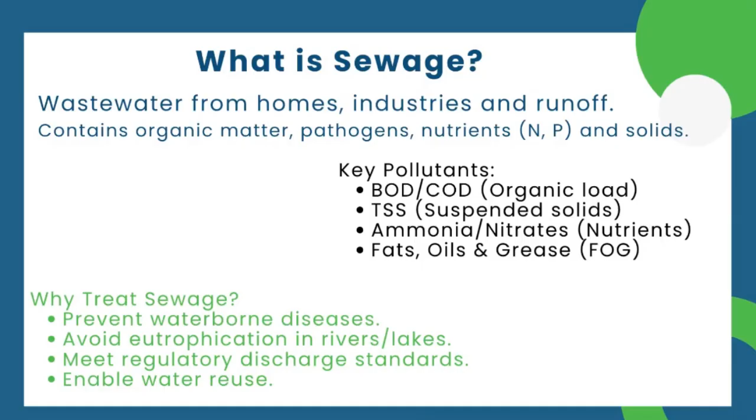As a result, what is happening? The untreated sewage is going into the ground, excess water is going into the nearby drain, like our Musi River in Hyderabad. And this Musi River happens to be the drinking water source for all the downstream areas. For example, Suryapet's drinking water source is the Musi River. And this water goes and joins another river, Krishna, which is the drinking water source for towns like Vijayawada, Guntur, even Chennai, right? So untreated sewage is like a time bomb. This is reason number one why we need to treat wastewater.

So here we are doing a very small exercise on understanding how to make sewage treatment plants work. We all hope this will contribute to better sewage treatment. Let us move to the next thing: the basics of biological treatment.

When we talk about sewage treatment, traditionally all our ancient civilizations, like Harappa and Mohenjo-daro, existed next to a water body, a lake or a river. If you see any major city in the world, not just India, every major city is next to a river, or there is a river in the middle of it, because in ancient times there was no means of transporting water. People had to live where water was available. A person cannot live without water, so the population had to exist as close to a water body as practically possible. So every major city has a river.

Now, how does it work? Whatever wastewater we generate typically goes into the river. We take water from the river, we give back our used water into the river. Now, what is the river doing? A river has a natural purification mechanism, which means it is purifying our sewage. How does this purification work? Like we discussed, there are three major treatments that happen.

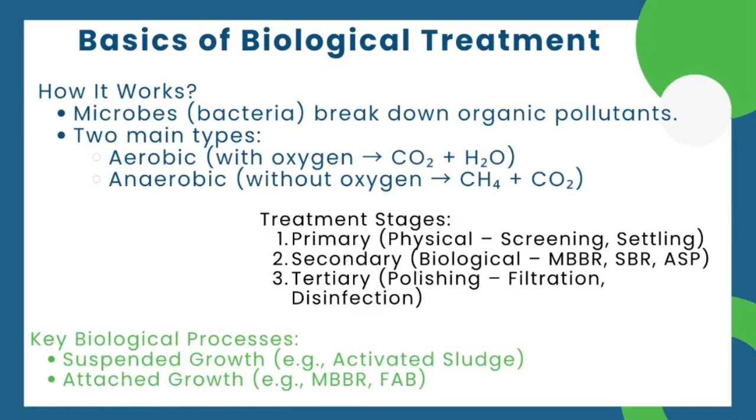All right. So one small concept that we need to understand here is suspended growth versus attached growth. What is the meaning of suspended growth? Suspended growth means bacteria is present in water. Attached growth means bacteria is not present in water, it is attaching to some surface like the walls of the reaction chamber or a process tank, right? Or MBBR media. There are advantages with attached growth. Suspended growth is a slightly older process, whereas attached growth is a more modern process.

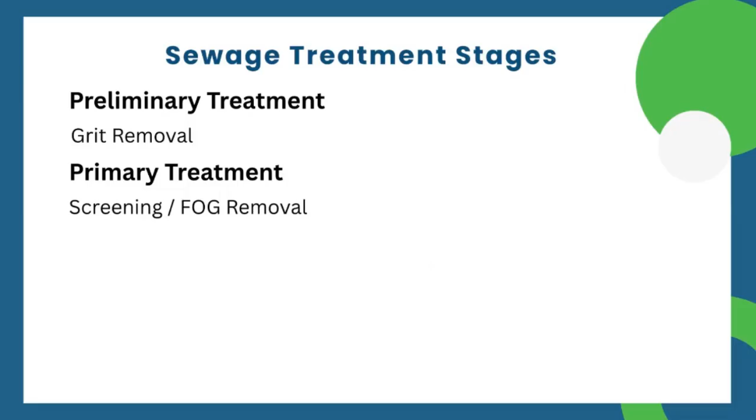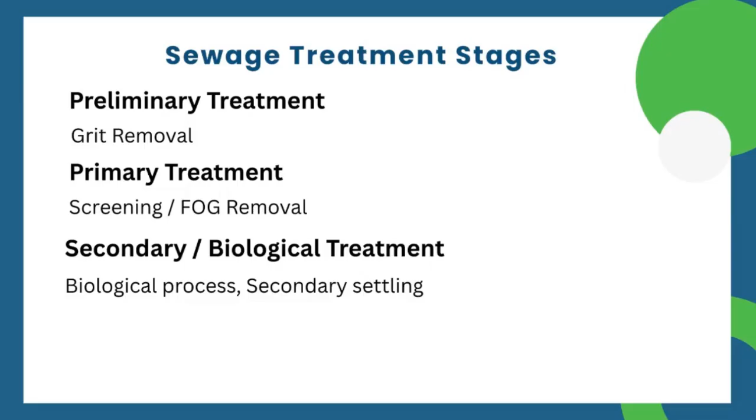So moving forward, preliminary treatment or primary treatment, as we discussed, contains grit removal, screening using bar screens, mechanical screens, rotary drum screens. Depending on the volume or capacity of the STP, we design the kind of primary treatment or screens that we require. FOG stands for fat, oil, and grease. And secondary is basically the biological process. And settling is also secondary process because you are removing dead bacteria and any physical impurities.

And finally, tertiary treatment is disinfection using chlorine or sodium hypochlorite or UV lamps, ultraviolet lamps, ozone or chlorine gas, and finally media filtration. When I'm not using the word pressure sand filter here, we could be using simple gravity sand filter also. Gravity sand filter or even a pressure sand filter, activated carbon filter, membrane filtration. These are all part of tertiary treatment.

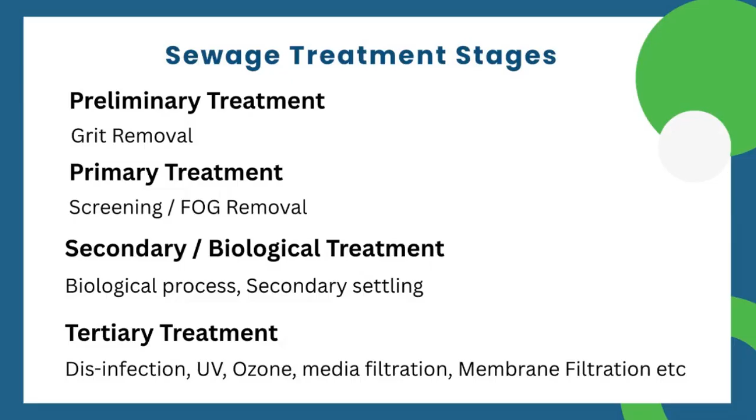All right, let's go back to the topic that we were discussing one slide before. Suspended growth versus attached growth. What is suspended growth? Suspended growth means simply bacteria is present in water, right? It is not attached to any surface. But what are the disadvantages of this? When the water is flowing, bacteria is basically something that you can't see with our naked eye. It's so small, it just goes out with water. So it's very difficult to retain bacteria in a suspended growth process. It is always going out of your process tanks.

That is why in traditional old process, you have sludge recirculation. It is called RAS, return activated sludge. So all the sludge is returned back continuously 24/7 into the aeration tank. Okay, now this is the older process, right? And what is the disadvantage? The disadvantage is you require huge process tanks. The retention time is much longer in the process.

And today, space is a premium. A square meter of land in city would cost anything from 50,000 to 1 lakh. So in such places, it's not possible to build huge tanks or spend a lot of money on investment in tank construction. So this is a disadvantage. We want a more efficient process. So the more efficient process is attached growth.

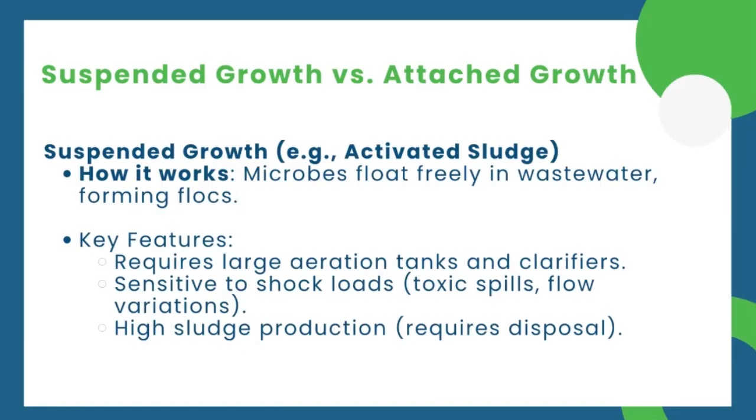All right. Now, this also has a second disadvantage. It generates a lot of sludge, right? And this sludge is again something that has to be separated and disposed of separately, which is again going to take more space and more equipment. So any suspended growth process, return activated RAS process, extended aeration process. Extended aeration process is one of the oldest processes of biological sewage treatment, and that uses this suspended growth process. As a matter of fact, SBR also uses suspended growth process, right?

Then what is attached growth? Attached growth is something where you are putting some media. Media means something where bacteria can attach and grow. It can be even a simple stone, pebble, right? In traditional ETPs, if you see, water is made to flow over rocks, large number of rocks. Rocks are used because there will be gaps between the rocks. Water still flows. If you use sand, the pores are very small and water may not flow through sand.

So there are odd shaped rocks used. So there will be always gaps and bacteria will stick onto those rocks and grow. It started with that. Attached growth started with that. From then, somebody thought, let me use some plastic sheet. They started putting plastic sheets into water. But the disadvantage is bacteria is sticking to plastic sheets, but when you are aerating the tank with air from the bottom of the tank, these plastic sheets started coming up.

The purpose got defeated. So then scientists thought of a process where a wheel-shaped, a gear-shaped plastic media is provided, right? It is always in water. It is providing more surface area per cubic meter. So on an average, the MBBR media that we talk about provides a surface area of 400 to 500 square meters per cubic meter of volume.

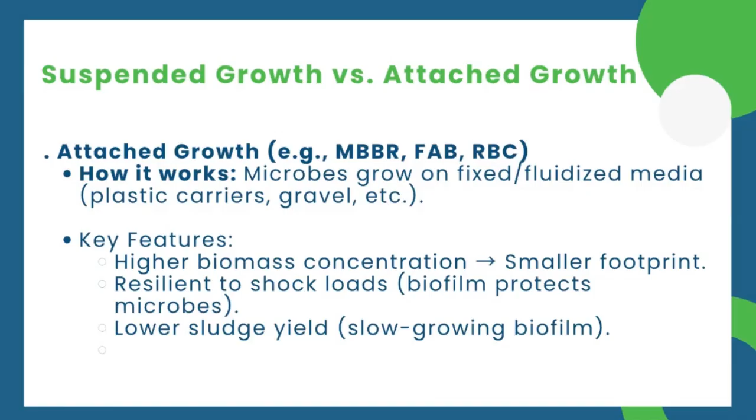So what is the result? We are able to reduce the process tank size. We are able to reduce drastically the aeration tank volume, the capacity, right? So this is a major saving in terms of space as well as construction cost. So if you are just comparing the suspended growth versus attached growth, in suspended growth, it has a large footprint. Attached growth, the footprint is very small.

And in suspended growth, along with water, bacteria is going out continuously. So it is not designed to handle shock loads. Whereas attached growth has a lot of bacteria there. So it is designed to handle shock loads. All right. And then sludge production is extremely high in suspended growth, whereas sludge production is low in attached growth.

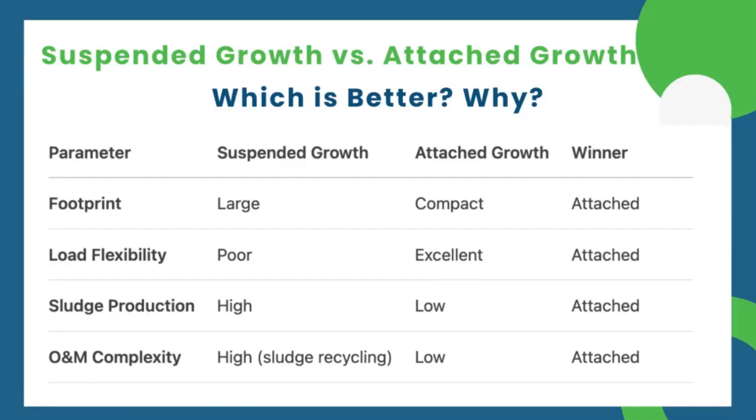All right. And from management point of view, operation and maintenance point of view, the complexity is not there in this one, attached growth, because there is nothing, no equipment. So there is no complexity. That's the only advantage you can say, right? Let's move forward. Why do we need either a batch process or continuous process? Why not have one process, right?

It's like this. Why do we have so many cars? Different people have different tastes. Likewise, different processes, different type of institutions where sewage is generated. We are not talking about only homes. A restaurant, for example. A restaurant does not generate wastewater 24/7, right? A hospital does not generate wastewater 24/7. A shopping mall does not generate wastewater 24/7. An office does not generate wastewater all through the day and night. A factory does not produce wastewater 24/7.

Right? So if I am designing a continuous process there, my process cost would be much higher. So I need some kind of different process where I can treat wastewater when it is available, right? So for this reason, because we have different types of wastewater sources, we have come up with different processes called continuous process or a batch process. Continuous process means the sewage treatment is taking place 24 hours, 7 days a week, 365 days a year. The plant is never stopped. It is a continuous process.

Batch process means whenever you have sufficient volume of sewage to be treated, you start a batch, and the batch will end in a given duration of time. For example, sequential batch reactor is a process that is popular as a batch process. In a sequential batch reactor, we divide the wastewater into 4 or 3 batches, right? That means in 24 hours, if there are 4 batches, each batch is of 6 hours duration. In 24 hours, if there are only 3 batches, each batch is of 8 hours duration.

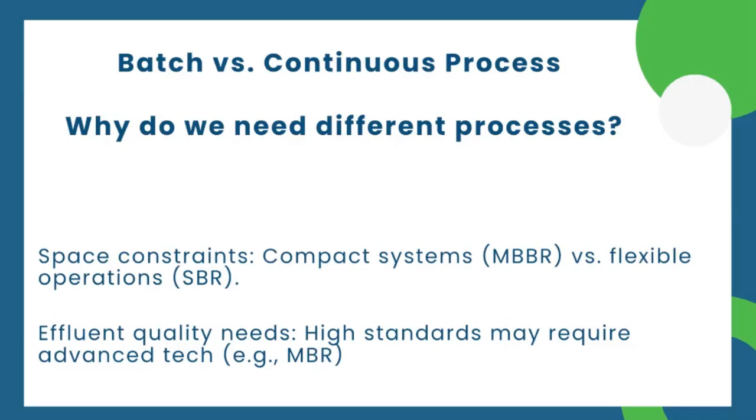For such eventualities, you have a process called batch process, and sequential batch reactor is a good example of this batch process. And sometimes we might also need higher quality water. Where you require higher quality water, you have a process called membrane bioreactor, MBR. So now we understood why different processes have come up, whether it is batch process or continuous process, MBR, MBBR or SBR. Okay, let's move forward.

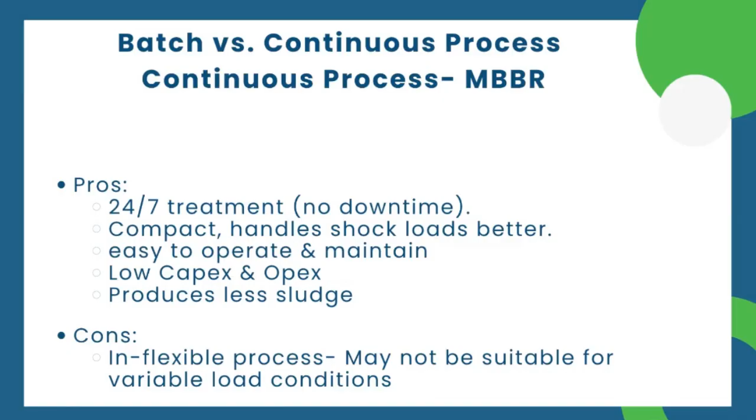Now, let us deep dive into what MBBR is. MBBR is nothing but bacteria growing on a biofilm, on a gear-shaped plastic component called MBBR media. The biggest advantage of this process is that this media is self-cleaning. If the bacteria attachment is very high, this gear is rotating inside the water because of the air coming from the bottom, and excess bacteria is simply shed off. It goes back into the water. So there is never a situation where bacteria is not having oxygen. It is always taking the dissolved oxygen from the available wastewater. This is a more efficient system.

Just to give an example of MBBR and SBR process aeration tanks. An MBBR aeration tank would probably have 6 to 8 hours retention. That means if my STP capacity is 100 KL, 8 hours retention means 1/3, so my aeration tank volume would be 33 KL. In the same manner, in the SBR process my aeration tank retention would be 24 hours, so the SBR aeration tank would be 100 KL. Comparing a 100 KL SBR versus MBBR, the aeration tank in SBR would be 100 KL and in MBBR 1/3, that is 33 KL. So this saves space and capital cost.

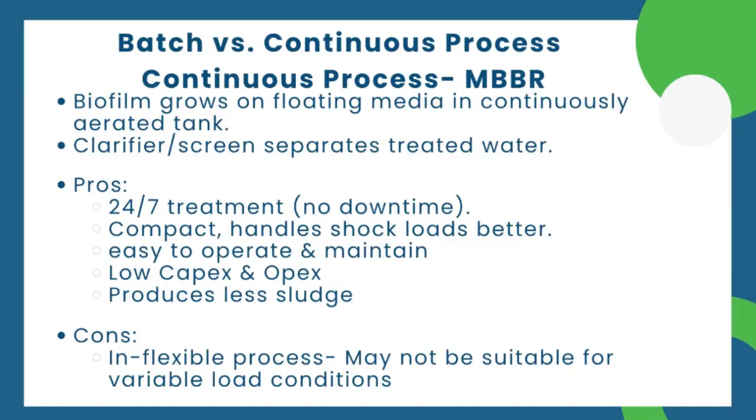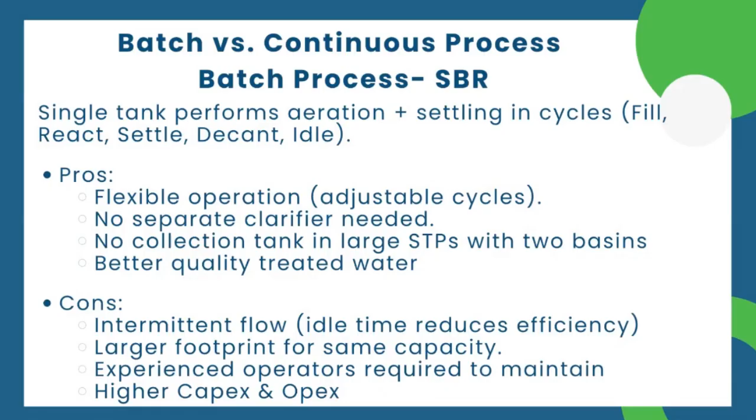And like we discussed, the capital cost as well as the operating cost is higher for SBR. So MBBR is a preferred choice. All right, let's move forward. But SBR is suitable for certain places where you are having fluctuating loads, where you do not know how much sewage is being generated on a given day. Let us say a hotel is there. If there is no sewage, your bacteria will die. If the occupancy is only 10% on a festival day, then the possibility of the bacteria dying is extremely high because you are not giving sufficient quantity. Whereas in SBR, if there is no batch, you don't process. This is the advantage of SBR.

Now let us look at the process flow. Today our focus is only on MBBR. SBR we are going to cover in depth in the next session, next Saturday. In MBBR process, the water enters into what is called a screen chamber. I am talking about small to mid size, maybe up to 1 MLD STPs. Municipal STPs generally do not use MBBR process. The reason being, MBBR is a continuous process, so you need to store water for lean hours. Lean hours means in the night there is no sewage generation, so you have to feed water, so you need to have a huge collection tank. Building huge capacity collection tanks is not viable for municipal process. If you are designing a 1 MLD or 5 MLD STP in a municipal situation, you need to store at least 2 to 2.5 ML; at least 50% of your STP capacity collection tank is required.

If you go for SBR, there can be 2 SBR tanks, one open at any point of time. The sewage is directly going into the SBR tank. When the batch volume is full, the process will begin. When the process is going on in one tank, the second tank is receiving sewage. So in large municipal STPs, SBR is a preferred choice. Whereas in domestic setups as well as small townships where the flow is less than 1 MLD, MBBR is a preferred choice. So let us stick to MBBR discussion today.